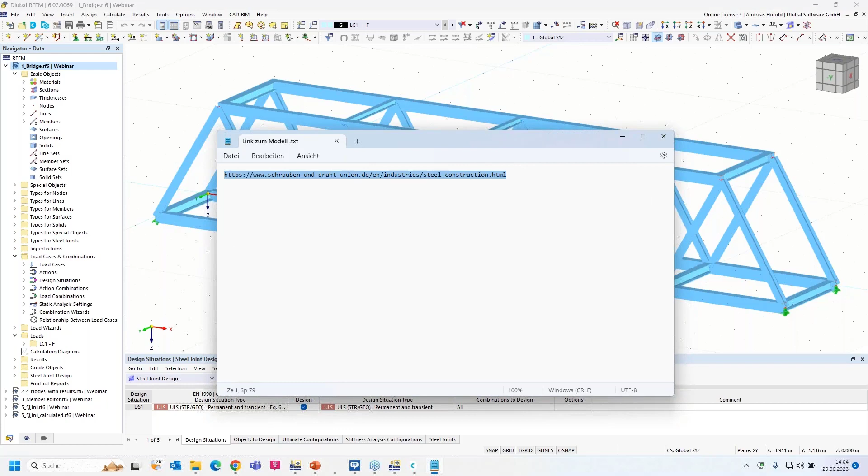Okay, then I turn to RFEM 6. That's a bridge. Maybe at first I show you where I have this. Oh, sorry, I have to open a document. Just a moment. I forgot to open it before the webinar. I will show you an image from the internet where I found the connection. So I have to copy that here and then enter it. Okay.

I found this connection from a steel bridge. And I would like to remodel it, so that you can see the possibilities of our steel joints add-on. You can also design such complex connections. I will enter only a part of this connection, and at the end I will show you the finished model. So let's start. I've already activated the steel joints add-on. Here in the base data, left above, add-ons, and then steel joints. And I had to select the standard, Eurocode 3, also the American standard AISC 360 would be possible.

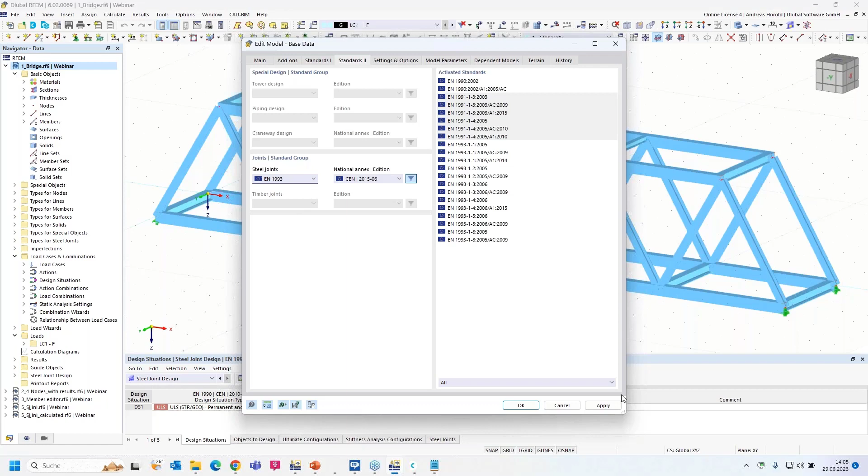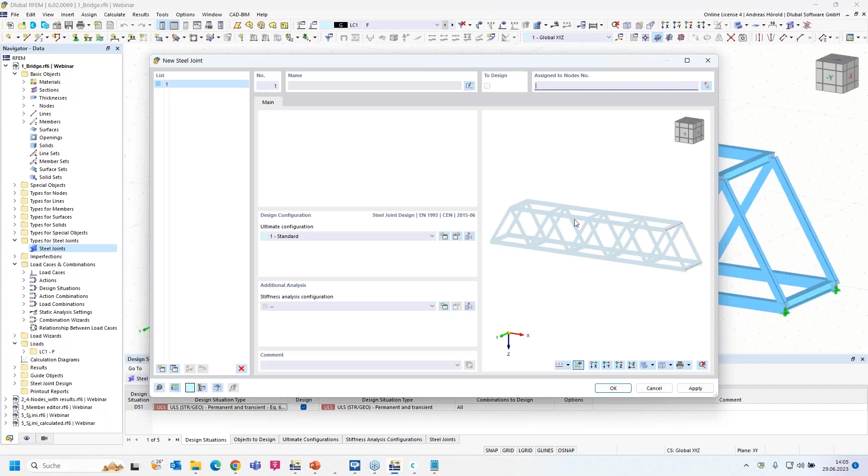Okay, so then types for steel joints in the navigator data, steel joints. With a right click, I can select new steel joint. So in the preview, you can see the whole steel truss bridge. I have to select a node. I select node number 1, the edge. So I'm going to zoom a little bit in. Yeah, I can leave the member names here. If I click on it, you can see it's selected in the preview.

I would like to rename them for a better overview. From member to diagonal, I enter only dia 1, dia 2, then horizontal beam and cross beam. So, okay, then I turn to the next dialog, members. At least one end needs to be supported. I leave that setting. And then the most important dialog, the components.

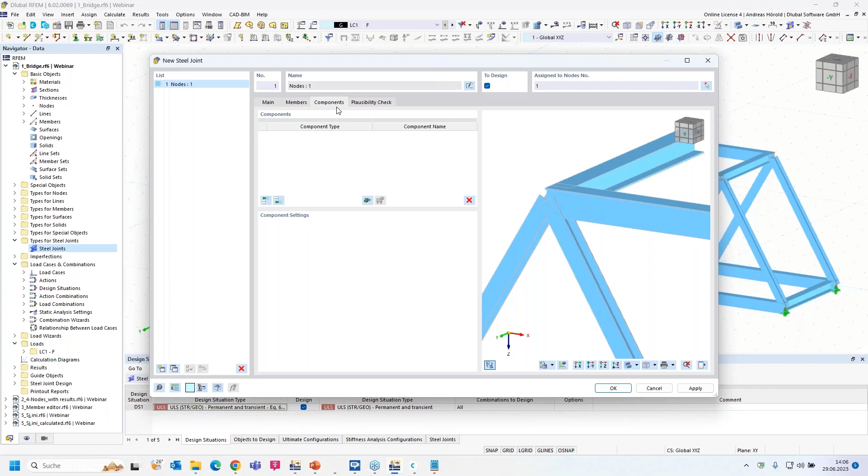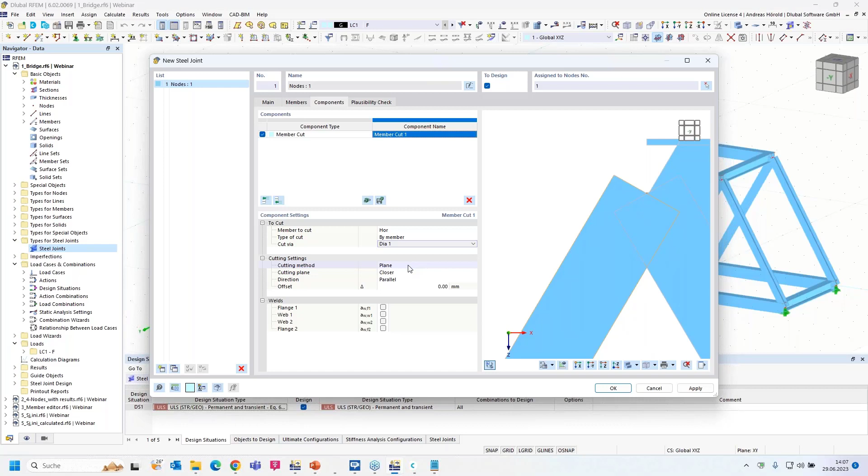So I start with a first cut. I would like to cut the horizontal beam. That's why I insert a component. Then member cut. Which member needs to be cut? The horizontal beam. You can also see that it is selected in the preview window, and cut via diagonal number 1. Sorry, again. Then perpendicular and the closer end, but we need to enter an offset 195.

No, that's not correct. Just a moment. Okay, not the closer, the farther end. And no offset. That was wrong. Sorry. Okay, now you can see the cut. The farther end of the diagonal number 1. So then I insert the next component, also a member cut.

I will need to cut the diagonal number 1 and cut via member. You can also select auxiliary plane or by plate. And this time by member and the horizontal beam. Didn't get it. Okay, horizontal beam. Then perpendicular.

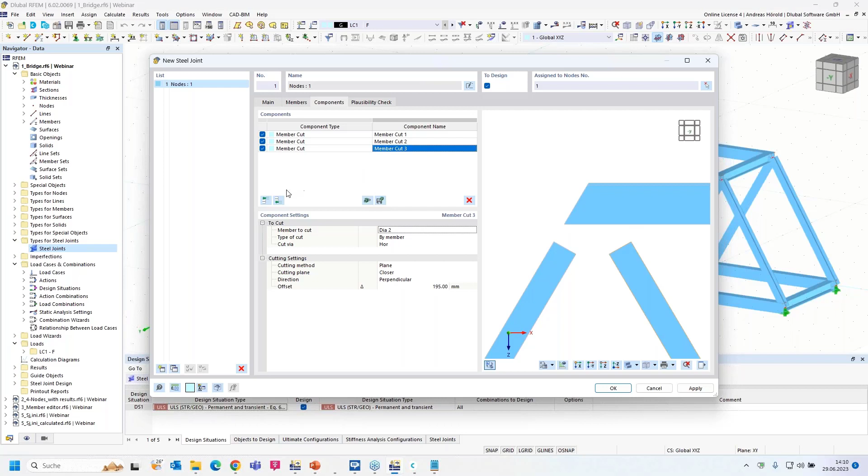And I enter sheet. You can see the different components here. We will use a lot of them today. So that's the plate. Okay. The thickness of the plate should be 17. The width 750.8. And this one 800. Okay. Then the origin should be the member plate.

I have to enter the material. Sorry. So then the values are correct. So, and then member plate, and the horizontal beam and web 2. Okay, I can show you where it is now. So you can see it. And if I enter here the half of the plate and the half of the web, minus 40.5, it will be moved on the outside. So, and I have to enter a value here. Okay, this position is correct.

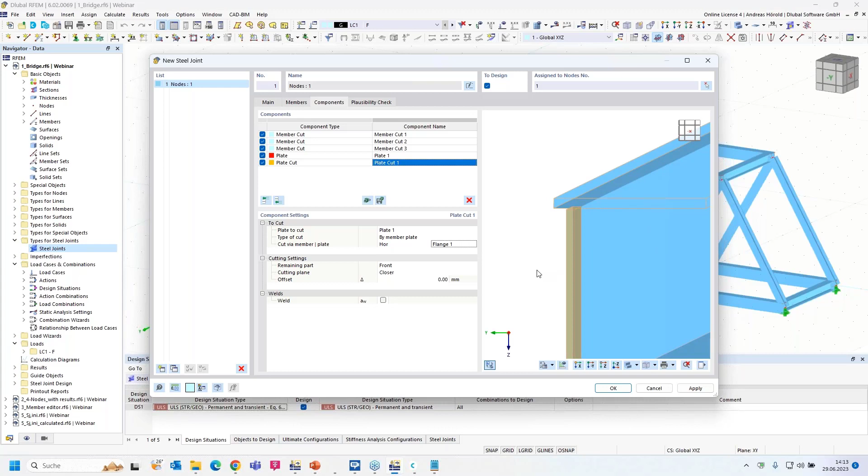So then we add a new component, the plate cut. Okay, plate 1 by member plate, the horizontal beam, and the flange 1. Okay, that's quite okay. And I would like to enter a weld. Not a double fillet weld, but a fillet weld on the rear side. Yeah, this one wouldn't be possible. Okay, and I enter another value here for the weld, 8 millimeters.

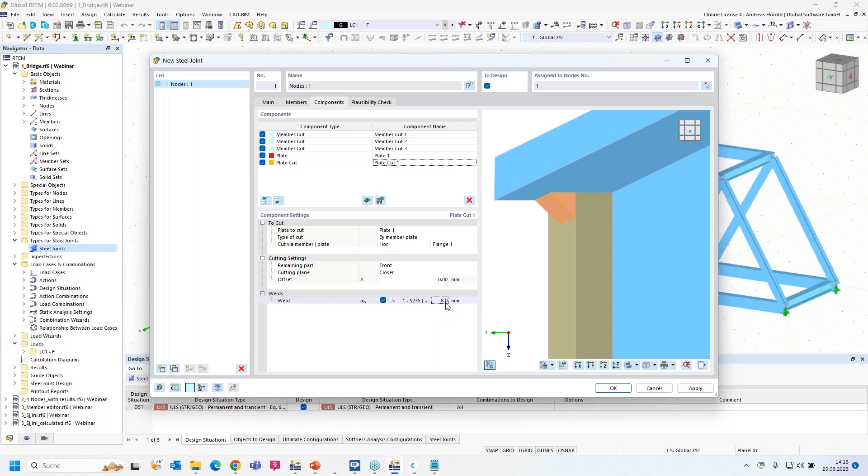Okay, then the next plate cut. Diagonal number 1 and the web. Okay, but the rear and, yeah, the closer end, but an offset of minus 125. Okay, yeah, that looks already quite good.

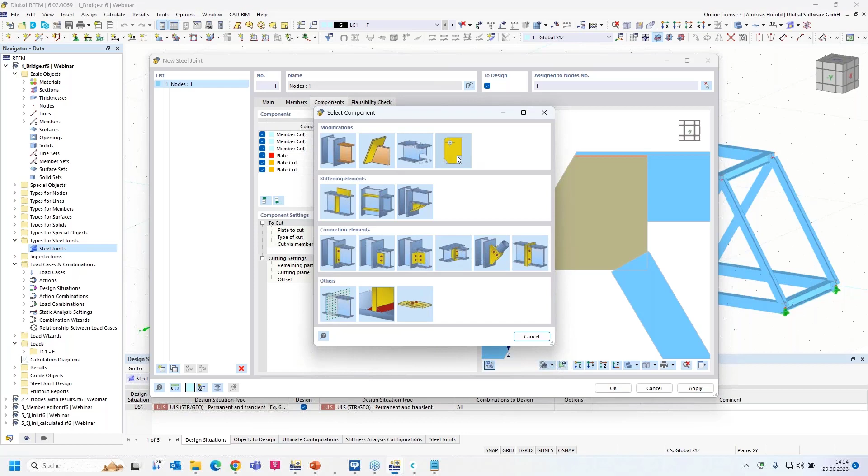So, and now we turn to the plate editor. I enter a new component, the plate editor. Plate number 1. And what is new is the opening, and we will use the opening. You can enter circles, rectangles, polygons, hexagons, these 4 possibilities. And I use the hexagon. You are quite flexible because you can enter the values here. It can create any hexagon.

So 300.11, 150, 260, 400 as offset or as center point. Okay, and with this plate editor, you can enter such things. You can also enter a rounding here as you want. So then another plate editor, I have to cut these triangular parts of the plate. So then the next plate editor.

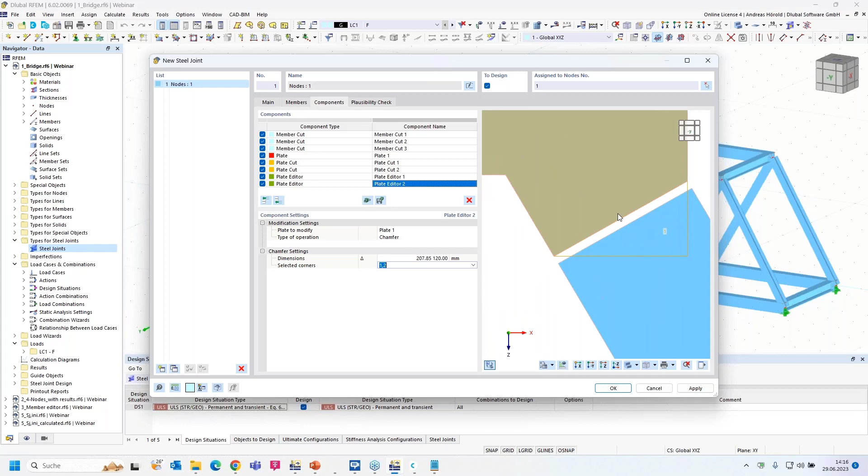So then plate 1, chamfer, 207.85, 120. Okay. And then I don't want to cut all corners, only 1 and 2. Okay. So, and that looks quite good now. The next step would be to enter our welds here, and then a lot of copy and paste.

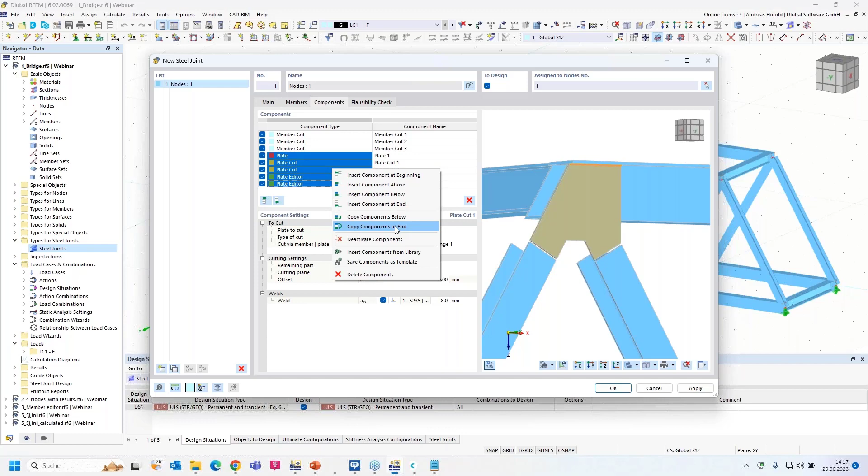I can show you how to, for example, copy and paste this plate here. I would select the last 5 lines, or what is necessary for the plate, and then copy components at the end. And I only have to modify the plate 2. I show you this view. So, and I only have to enter 14.5 and the other web, horizontal beam and web 1. And now the position is correct.

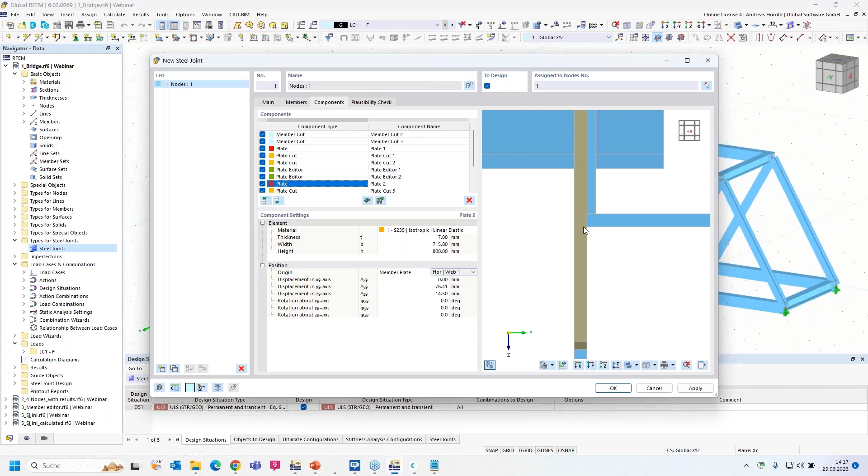Then it would be necessary to create other plates and fasteners and so on, but that would take too long. I switch to the finished model. Just a moment. That's the finished model of the steel truss bridge, with the 4 edge connections here, also of the cross beam. You can see the fasteners and so on.

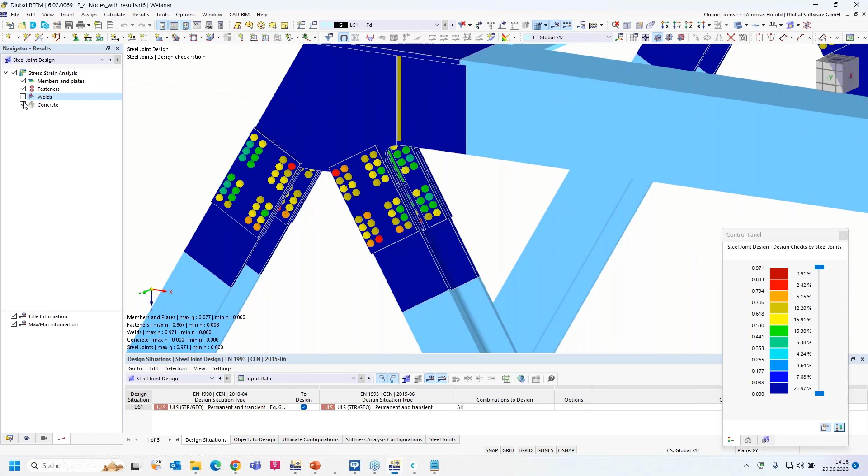And if you want to see the results, you can check it here in the navigator results. You can see the single components, for example only the fasteners, and the design ratios. In the table below, you can see the different design check ratios. Maybe I'll check also the welds and so on.

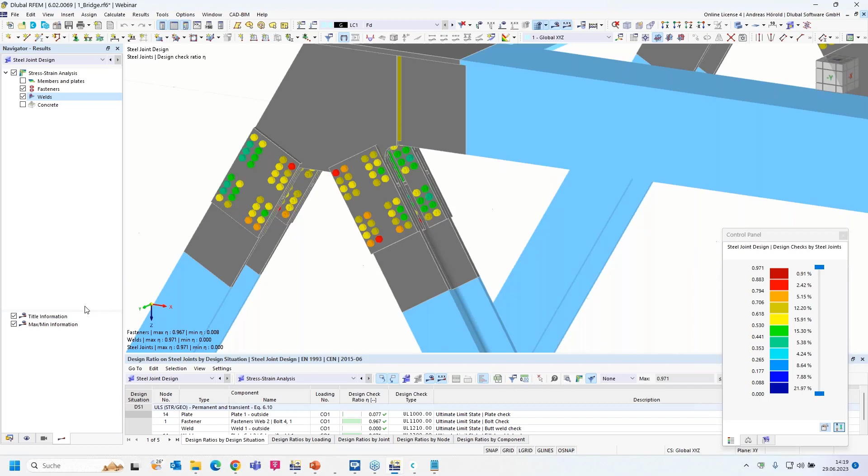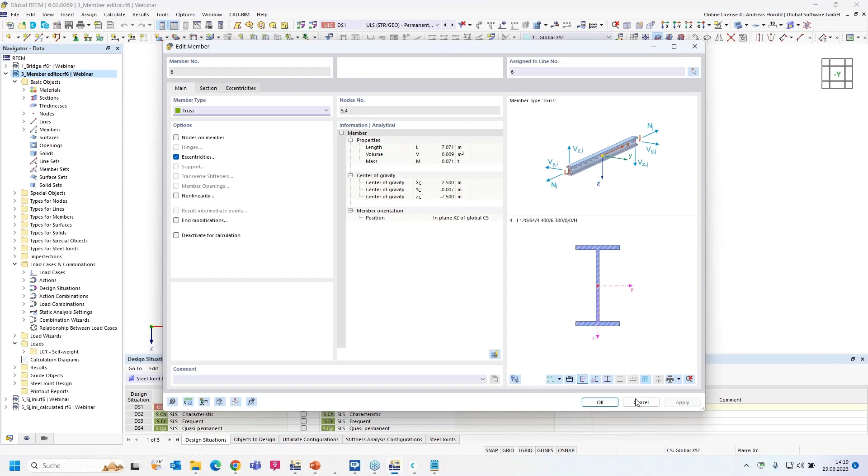I close the model and turn to the next model. So that's a multi-story frame with different diagonals. This diagonal is an I section, this is the same I section, and this is a rectangular hollow section. That possibly makes no sense in practical use, but I would like to show you 3 different connections for diagonals, the first one and the second one with the member editor.

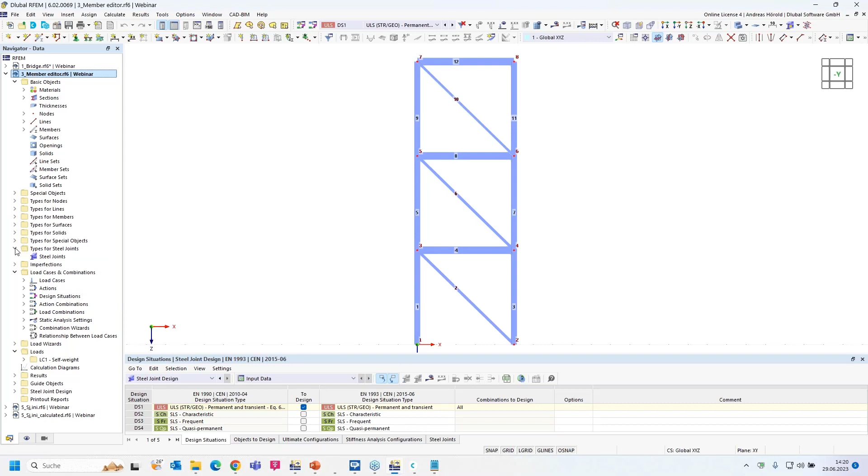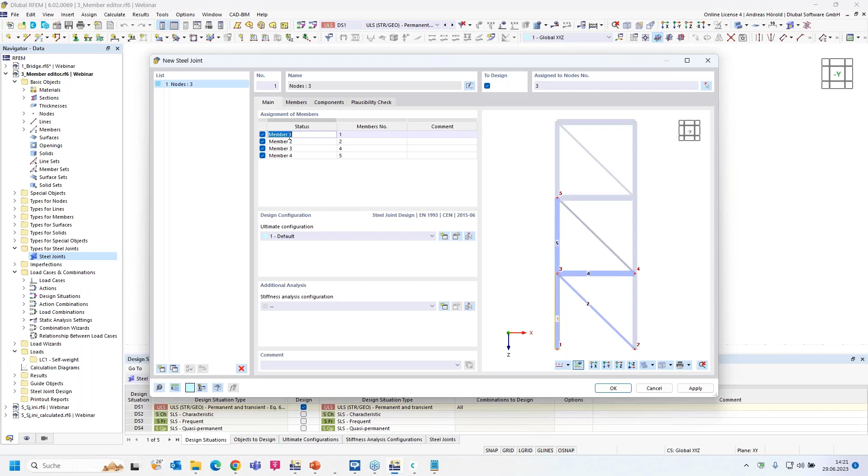So I start with that point here, steel joints, right click, new steel joint. I select the node. Okay. And I will rename the single members as well. Another possibility is you can change the order of the members if you want. Maybe I can show you how to do that. That's the column, and the next, in my eyes, should be the horizontal beam. Horizontal beam, okay. So this one should be the diagonal.

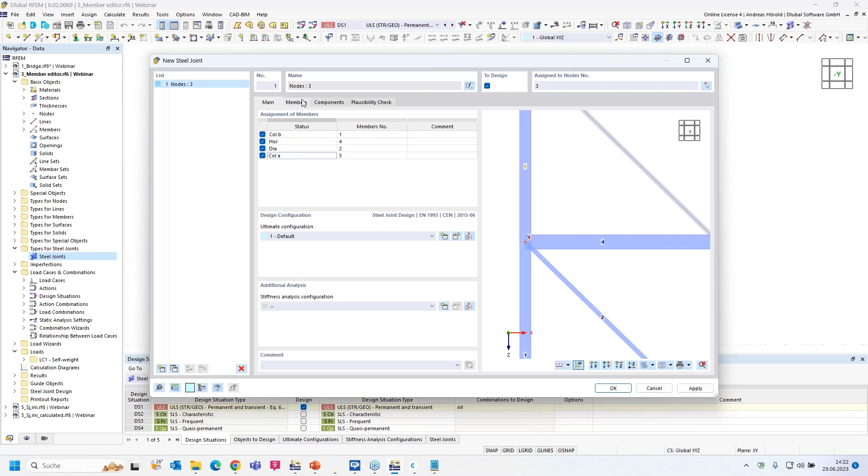And the last one, the upper column. Okay, that's a possibility. I will rename one. So that's the column below. This is the horizontal beam, diagonal, then the column above. So then we turn to the members, at least one should be supported.

And I also have to select continuous, so that we can connect the horizontal beam to the continuous column. It didn't get it, just a moment. Okay, now it's correct. So then components. I start with an end plate. I enter this component, end plate,

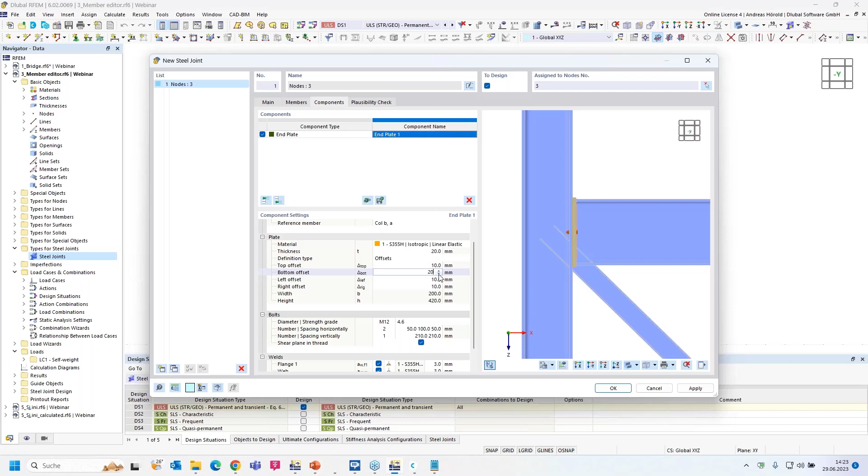the horizontal beam. So I zoom a little bit in. And the reference member should be the continuous column. So the same material as for the members. The thickness should be 20, then 200. So, and then I can show you the left and right offset, 5 millimeters and 5 millimeters. Okay.

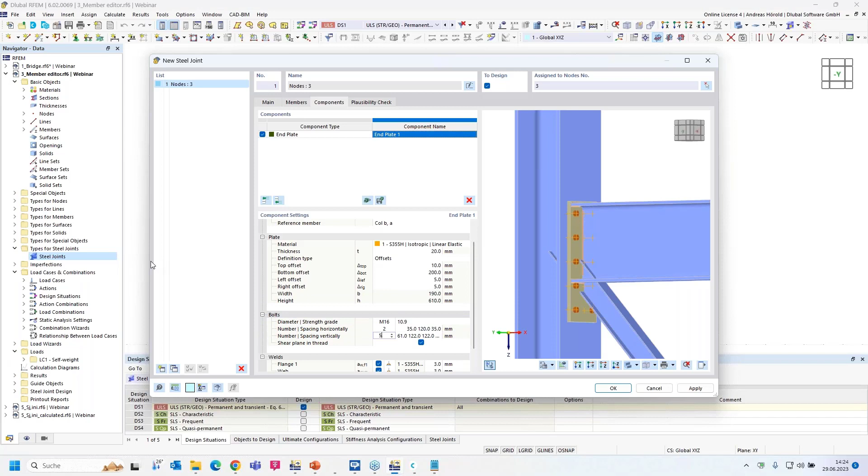So then the bolts, the diameter should be 16 and the strength grade 10.9. So I only have to enter the vertical spacings, and we got 5 vertical spacings. I can also increase the window so that we can see all values here.

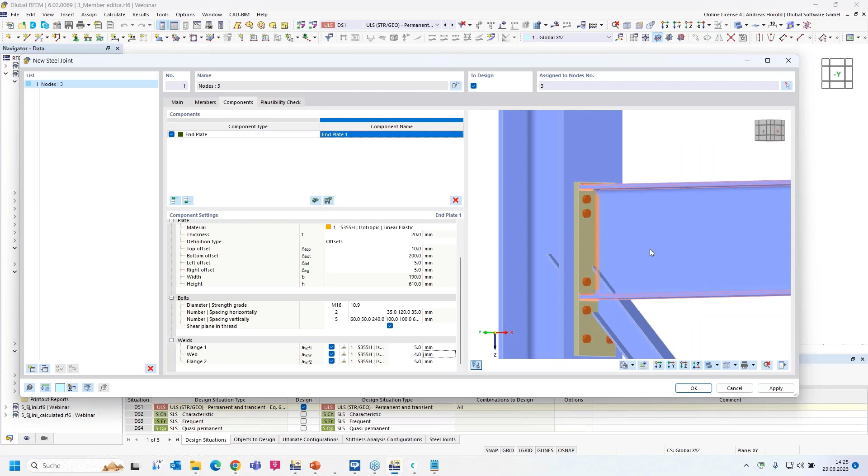So, okay, and 60, 50, 240, space 100, 100. Okay, so that should be all for the bolts. And I only need to define the different welds. 5 for the flanges and 4 for the web. So, okay, that's all for the end plate.

And now I enter a haunch here. Maybe I show you this view. Next component, haunch. So where should the haunch be placed? On the horizontal beam. And the web is okay. Plate. So, and then end plate 1, plate 1. That's okay. So material, the same as for the members.

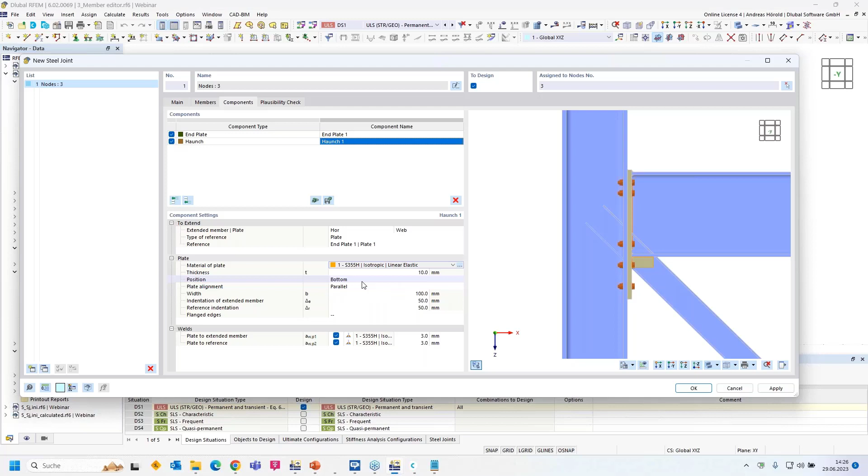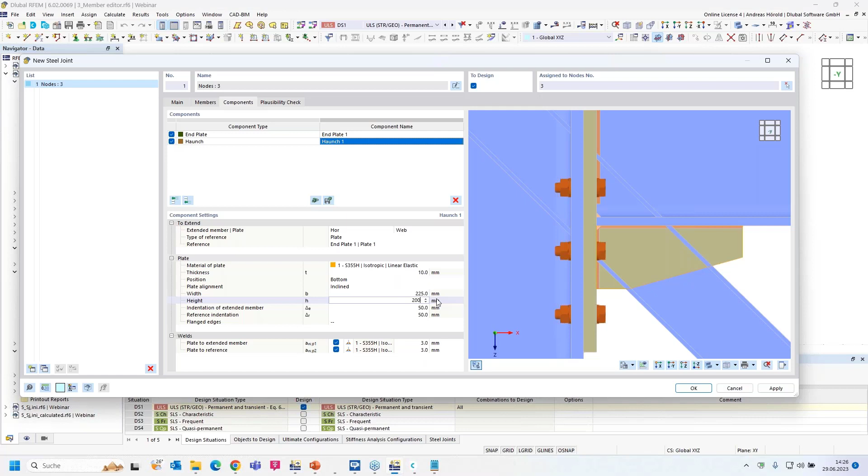Then at the bottom, okay, but not parallel, but inclined. So then the different values, 225, 200, 100, 125. That looks quite good. We only have to define the welds, 4 millimeters. Okay.

So, and now we need to cut the diagonal. Yeah. Diagonal is too long. You can see that in the preview. So that's why we enter the next component at the end, a member cut. So as I already mentioned, the diagonal by member column, then plane is okay, closer end, but not parallel, perpendicular. So with an offset of 100 millimeters. Okay, that looks already quite good.

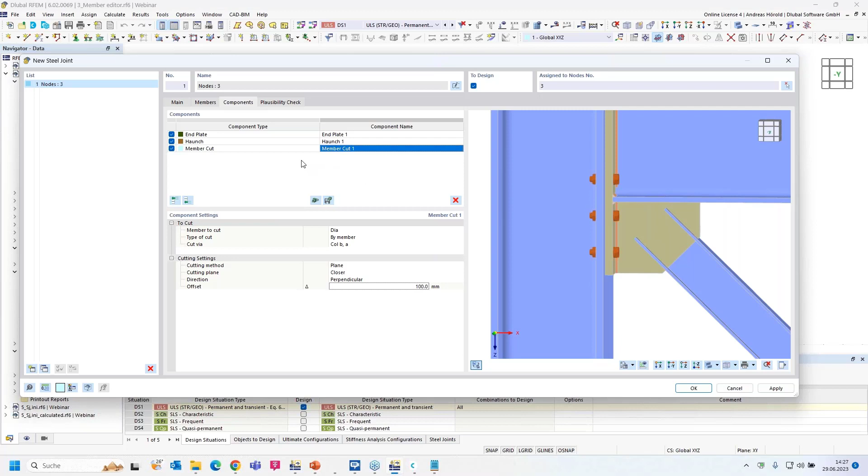So the next step is the member editor. That's quite a new component. So I add it at the end. Member editor. So then member plate is okay. Diagonal flange 1. So, and with an end offset. And the offset should be 130. Now you can see in the preview window what we did, we cut that flange. So that was the upper flange, and now we would like to cut the lower flange.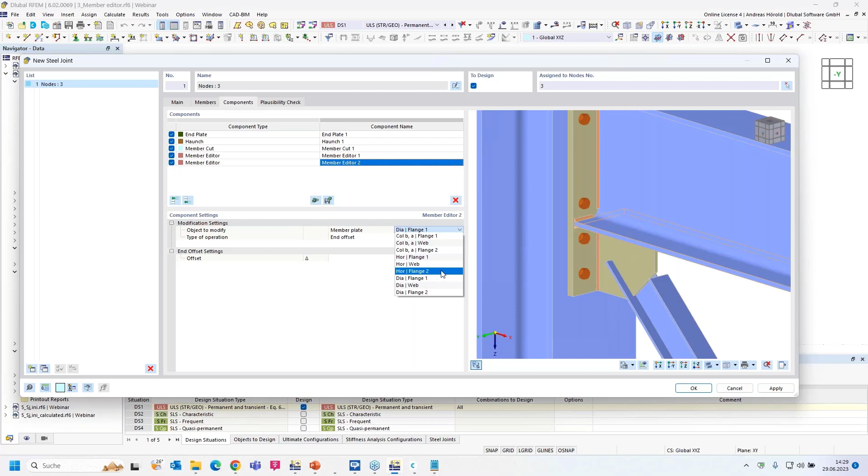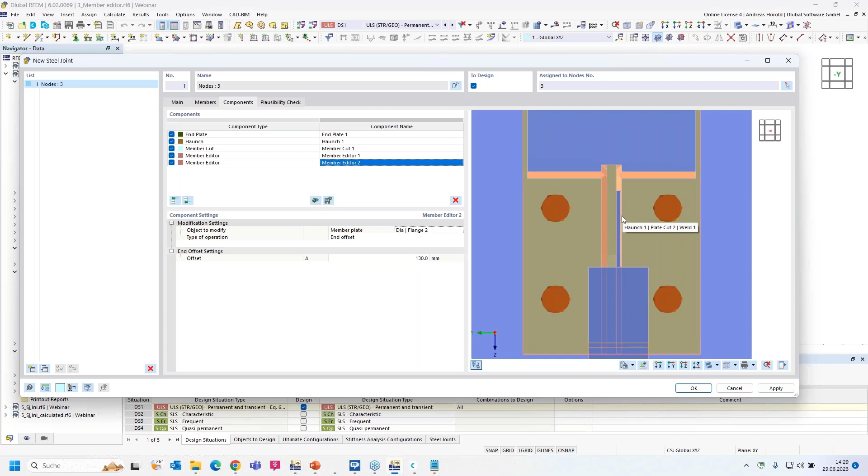That's why I copy that component, copy components at the end. So, and for flange 2, diagonal flange 2. Yeah, that's all. So now you can see that the web is not exactly in the axis of the haunch. That's why I defined a small eccentricity in the global frame model, so that the connection will be fine. Just for your information. Okay.

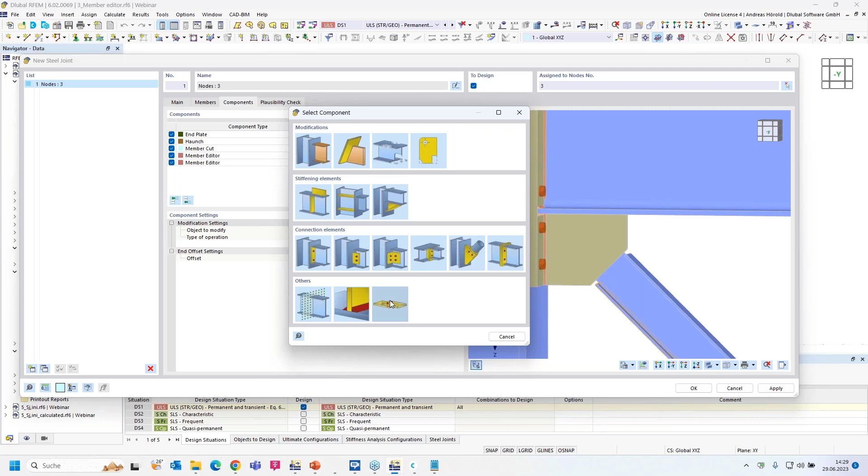Yeah, last but not least, we have to enter the fasteners at the end. I will enter a component, the fasteners, the last component in this dialog. So then component plate of the haunch, and then member plate, and diagonal and the web. So those components should be connected with the fasteners. Then the position diagonal web.

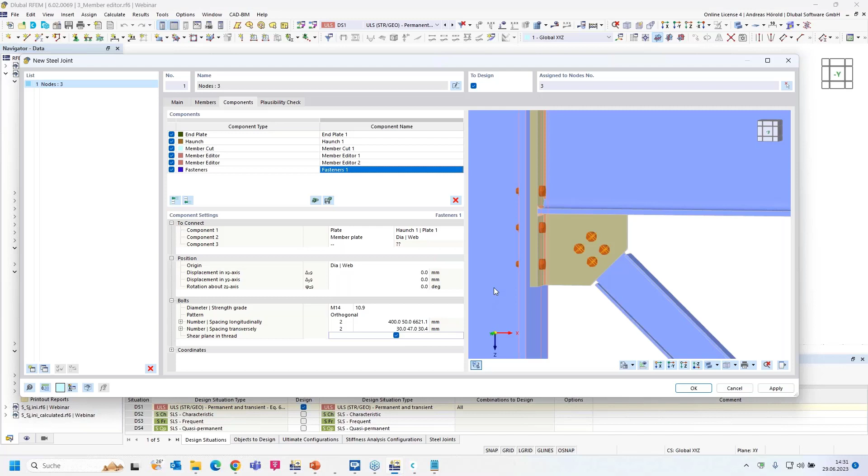The diameter should be M14 and the strength grade 10.9. I have to enter the spacings here. Okay. Also, there should be 2 fasteners, then 30. Okay. Yeah, that's all. You can cut such member flanges, for example, with the member editor.

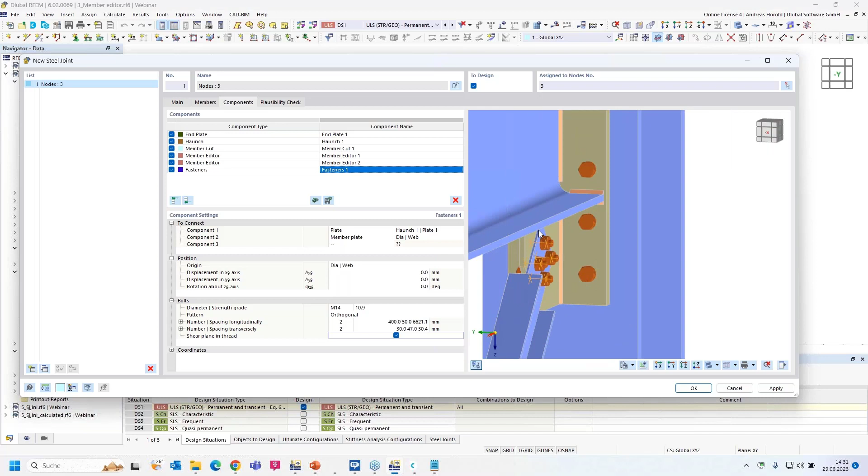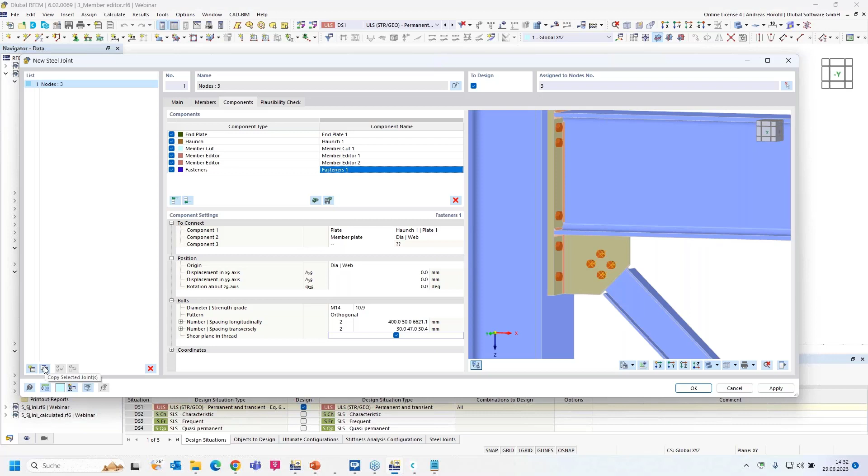In the next connection, I would like not to cut this part of the flange. I think it's not necessary, and it's better for the flow of the forces. That's why I copied that connection, or that steel joint, with that button at the bottom left. Copy selected joints. So, and I select node number 5, and I delete node number 3. So all was copied, but I need to modify the member editors.

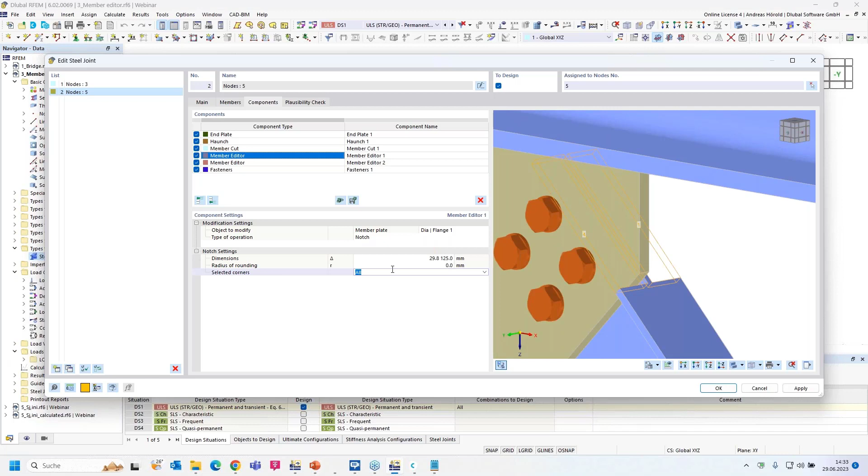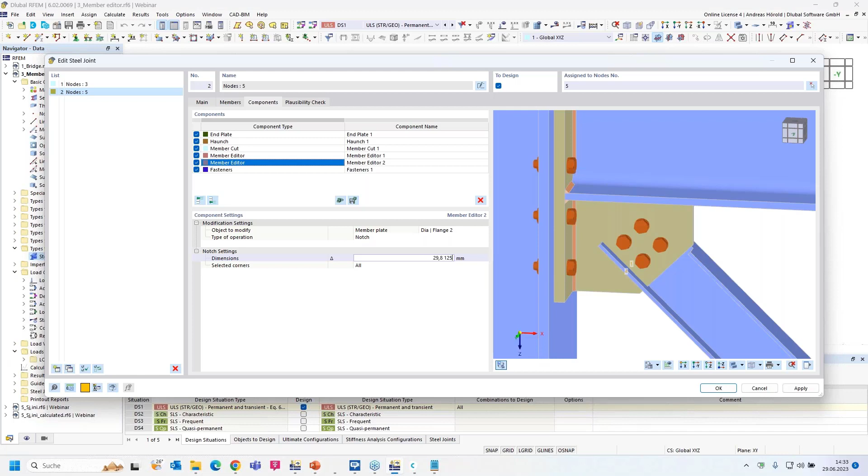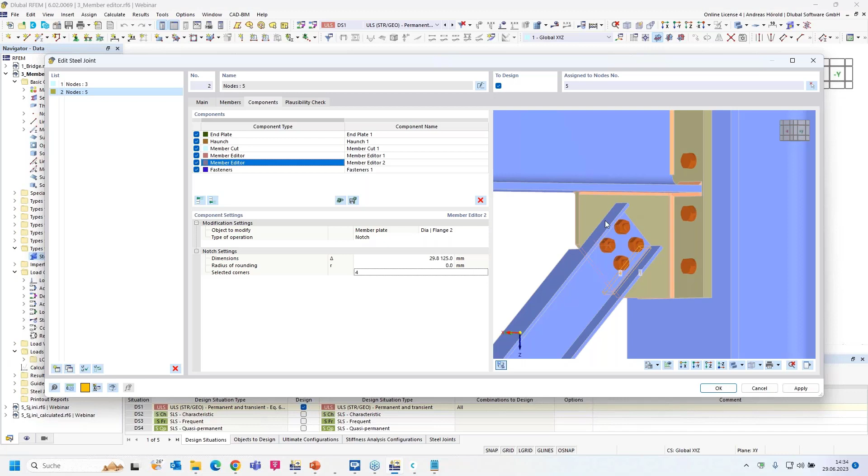The same for the other member editor. Notch. And the same distances here. So, and also only part 4. So you can see, almost the same steel joint, but with this part of the flange. You can see how flexible you are with the Steel Joints add-on.

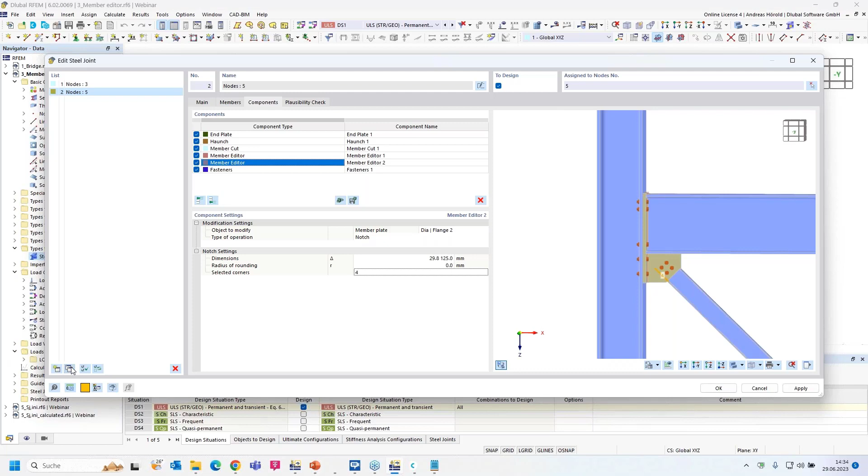So then another example with the rectangular hollow section. I copy the connection again. Select this node. Okay, and delete node number 5. So then the components. Now we have to modify something. We can use the end plate, the haunch, the member cut, but we delete these lines.

Okay. And I have to modify at first the member cut. So I have to enlarge the column, 240. The diagonal, sorry. That's okay.

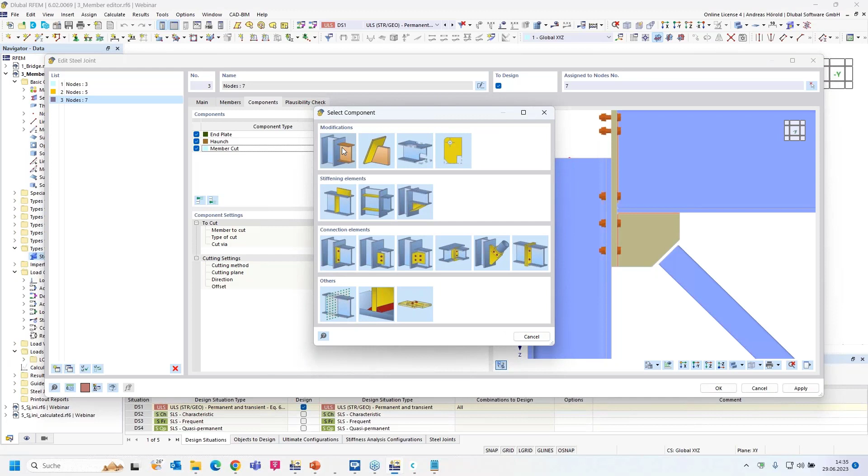Just a moment. So then I have to enter another member cut to enlarge the column here. So member cut column by member by horizontal beam, plane the farther end, and with an offset -50. So that looks quite good.

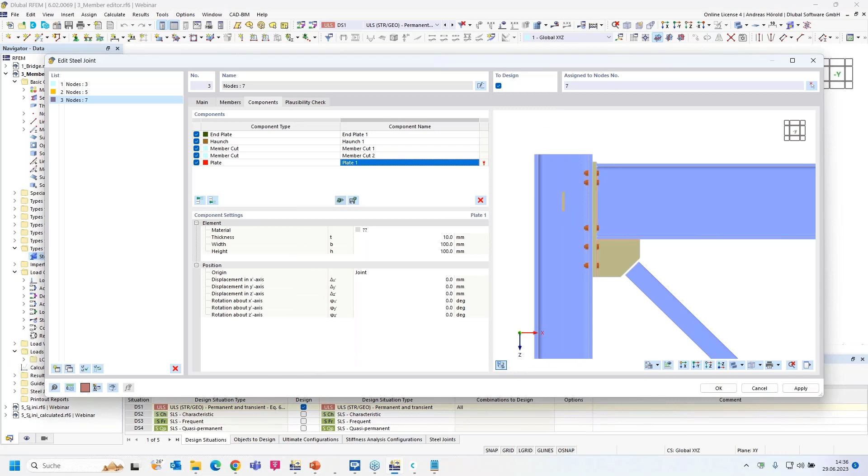Okay, then the next component, plate. This component, plate. This should be the plate in the rectangular hollow section. There will be a weld and a member cut, and we connect this with fasteners or with bolts. So then material, same material, thickness 5, and width and height.

Then plate. Which plate? The haunch. I didn't get it. Okay. So, we have to enter the dimensions or the displacement. 63, 45, 7.5, and we have to rotate it 45 degrees. So, yeah, that's quite okay.

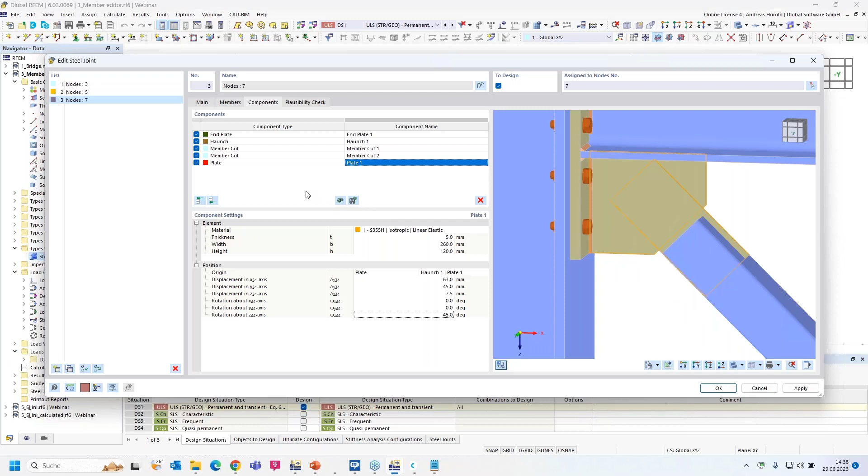So, and now we have to cut out this part here, where the plate is. So that's why I enter a member cut. Diagonal by plate. And plate 1. So then by surface, that's quite good. And we have to enter the welds for the flanges.

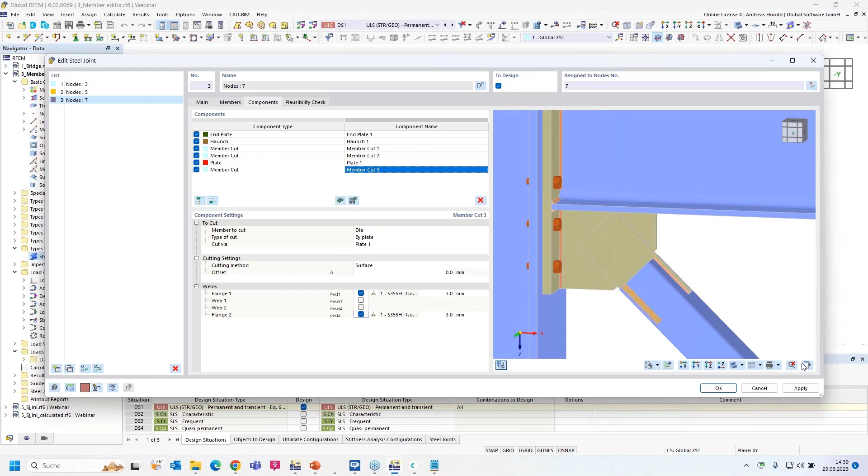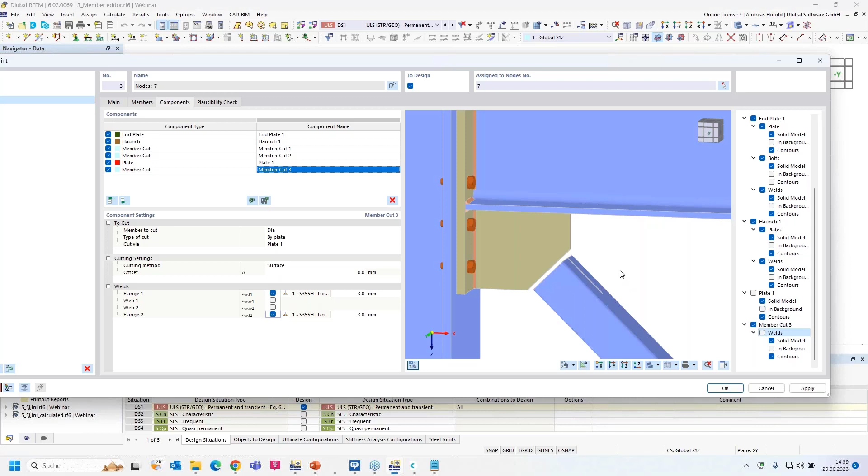So maybe I show you the result. Right at the bottom, you can click on that button. I have to move it a little bit, and you can select and deselect the different components. And if I deselect, for example, the plate, and from the member cut, the welds, now you can see that cut here. That was the member cut.

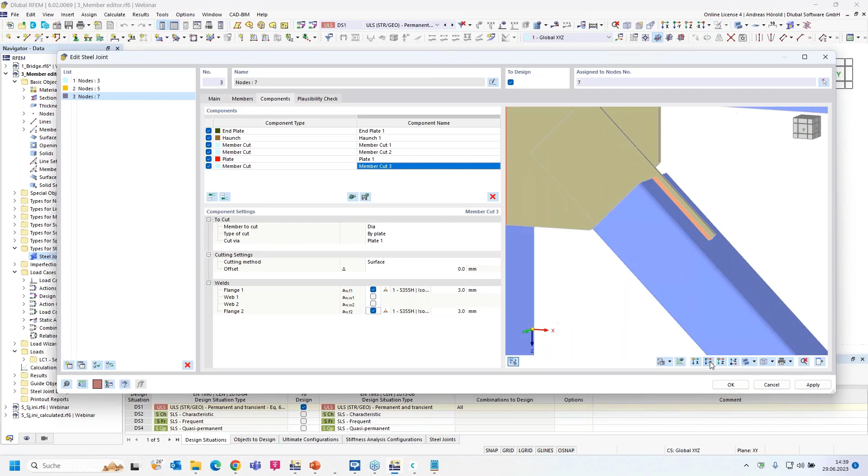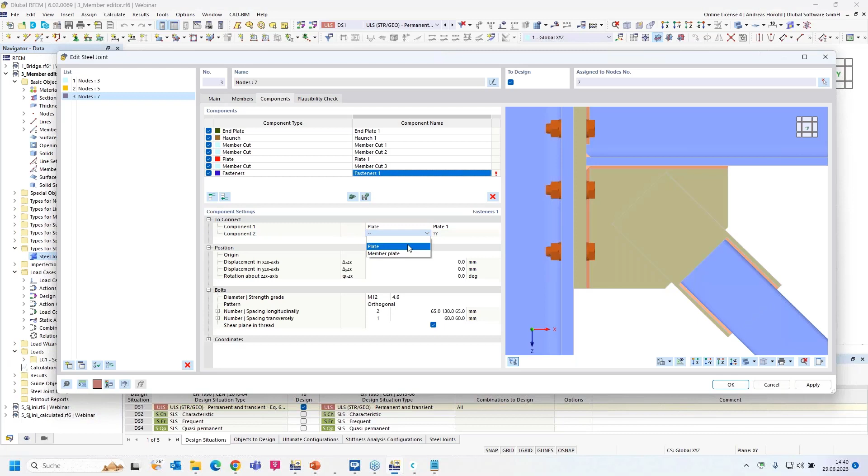So I select all again, close this area of the single components. So, and we have to enter the fasteners. So at the end, I add the fasteners. Which components should be connected? The plate, plate 1, and the haunch. So, okay.

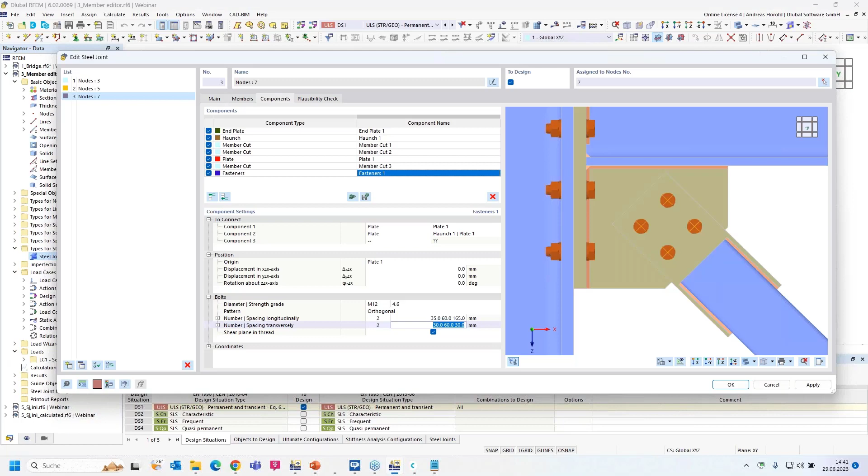And we only need to define M12 4.6, that is okay this time. Then we need to enter the spacings, 35, 60, and yeah, that's quite okay. Now you can see the connection is finished. You can see with these examples, you can connect different cross sections as diagonals. You have got all possibilities. Only some examples.

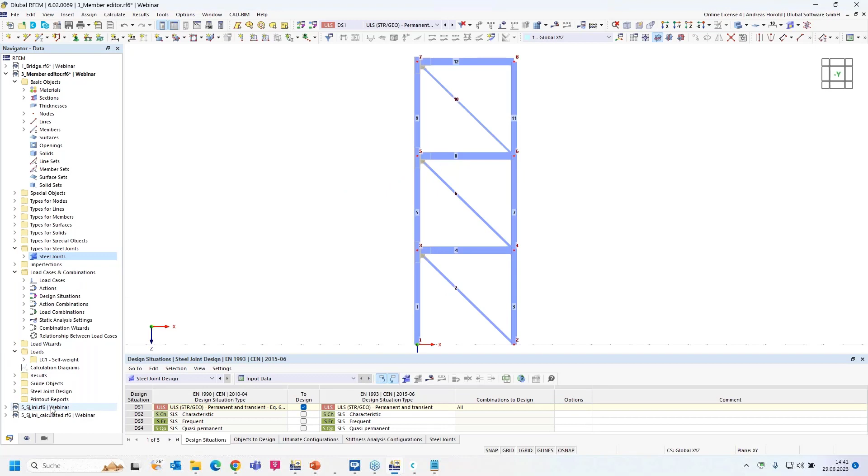I turn to the last part of the webinar today, the initial stiffness, a quite new feature. I open another model, a simple steel frame. And I would like to show that on that example with a rigid connection here at the end. And I enter a DSTV, a standardized connection where you can see the initial stiffness.

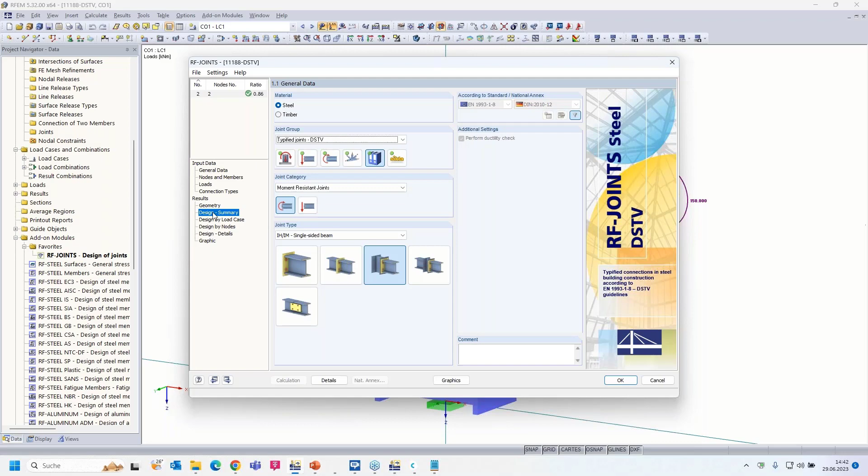I show you that in RFEM5 we had the RF-JOINTS add-on. That's a DSTV connection. I can show you the general data, typified joints according to DSTV. And I designed it, and you can see the initial stiffness from the guide, 33.6. And we remodel this connection in RFEM6 and compare the initial stiffness of the DSTV guide and from the Steel Joints add-on.

So I turn back to RFEM6. I create a new steel joint. I can select the two nodes. Okay, so I rename them again, the column and horizontal beam. And that is a new component here, the additional analysis, a new feature in the Steel Joints add-on. I've already renamed it. You can go to the dialog. That's the new feature, initial stiffness.

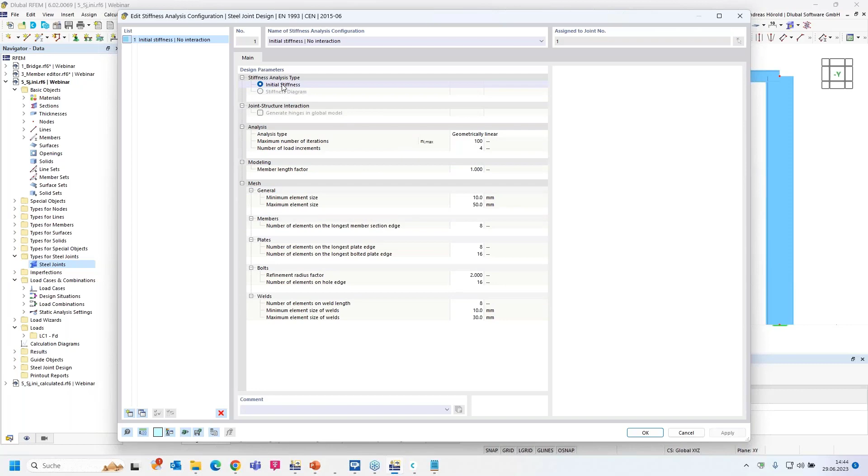And the stiffness diagram and the possibility to generate hinges in the global model are already there in gray; those are features that we will implement in the future. Okay, so we would like to calculate the initial stiffness of a certain connection. So members, next dialog, at least one member end should be supported. So, and where is the stiffness analysis?

And if you want to analyze the stiffness of the connection, you can select here normal forces, the moment, My and Mz. To compare it with the DSTV guide, I select only My. But you can also select all. So that's all for this dialog.

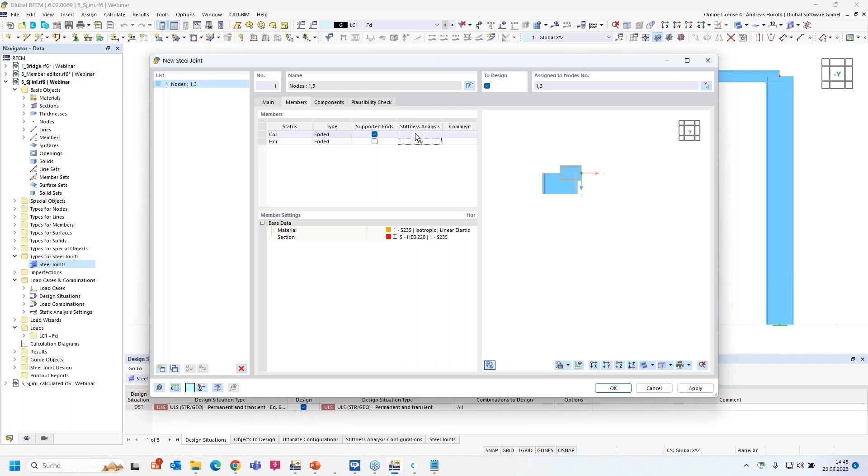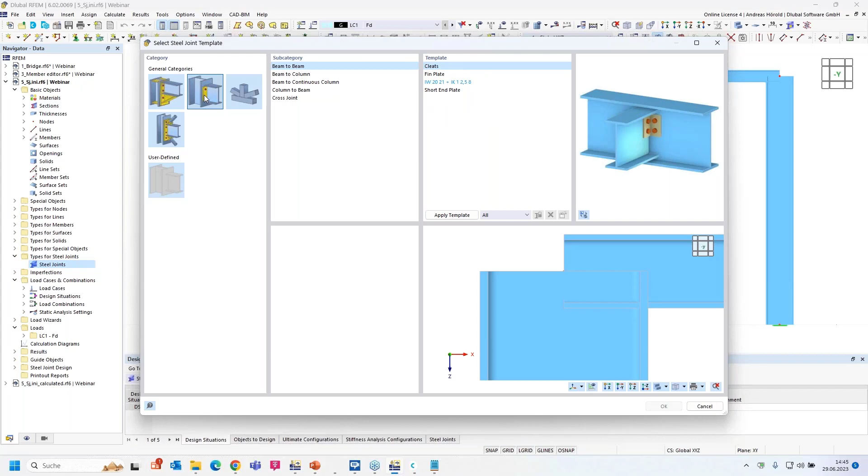I enter the components. And this time I go to the components library, a quite large library with predefined connections. Here the main category is rigid, then pinned, the truss connections, bracings, and we would like to use the rigid connection: beam to column and the end plate column stiffness.

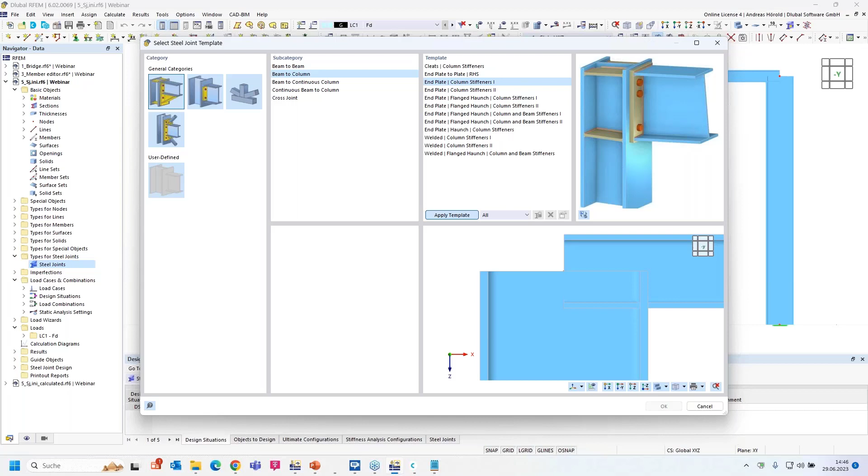Then if I select apply template, the single components of this connection are loaded in our Steel Joints add-on, and then you can see in the preview that the connection looks quite good. We confirm it with OK. And we have to enter or modify the connection according to DSTV.

First, I modify the member cut. I enlarge or increase the length of the column. I can see that in the preview. We will have bolts also over the flange. That's why I have to increase the height of the column. So then I have to modify the end plate.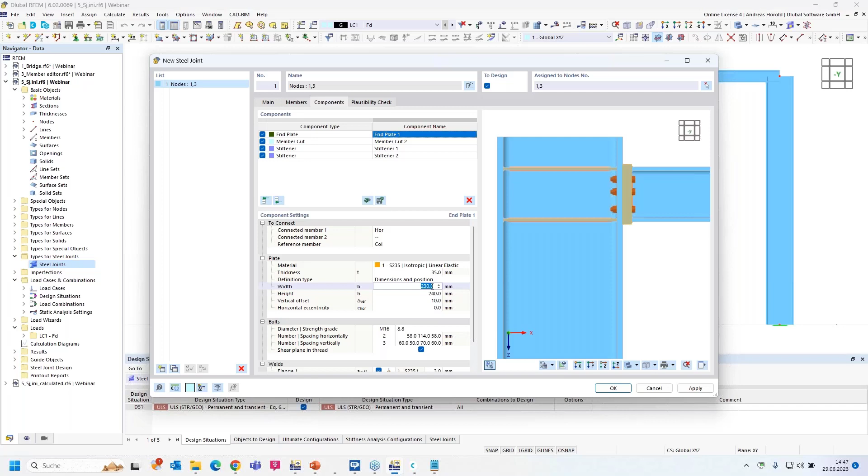The thickness should be 35. Then I use this time the dimensions and positions to enter the values from the DSTV guide. 340, 105. Okay. So the diameter should be M24 and the strength grade 10.9. So then the different values from the DSTV guide.

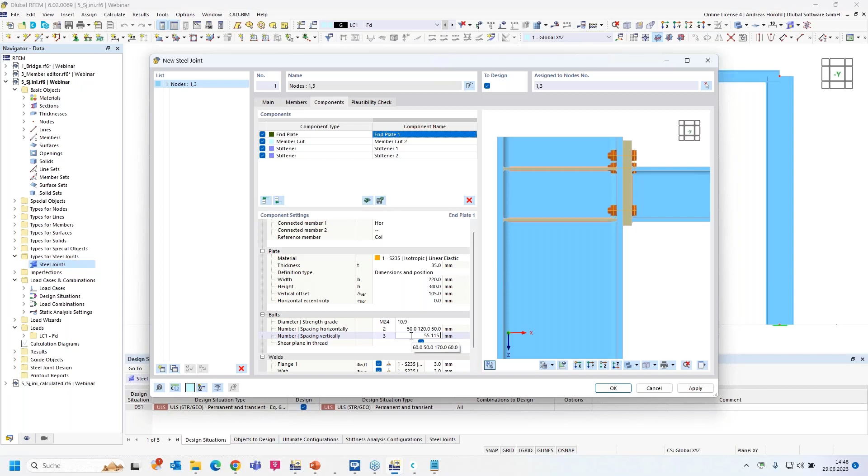(55), 115, space 90. And the last dimension is calculated automatically. So that's quite all. Now the welds. But before I enter that, I have to uncheck that the shear plane is in thread, because according to the DSTV standard, in the DSTV guide, the shear plane is in the shaft. That's why I uncheck this.

And now I enter the welds of the flange, 8, 5, and then this flange, 8. Okay. That's quite all for the plate. So stiffener, we have got 2 stiffeners. I delete the second stiffener.

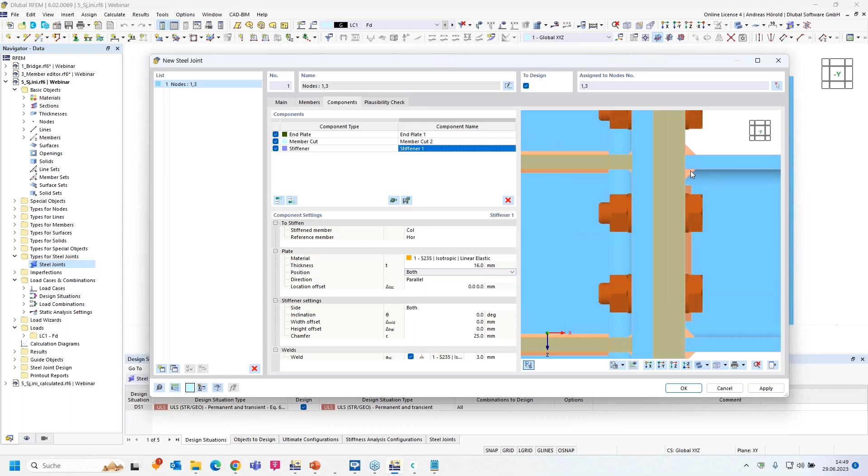So modify stiffener 1. At first, I select side, the position, both. And now I can only do one entry. 16 millimeters. According to the DSTV guide, the thickness of the stiffener should be minimum the thickness of the flange of the horizontal beam. Okay, that's all. I only have to define another weld, 6 millimeters. Okay.

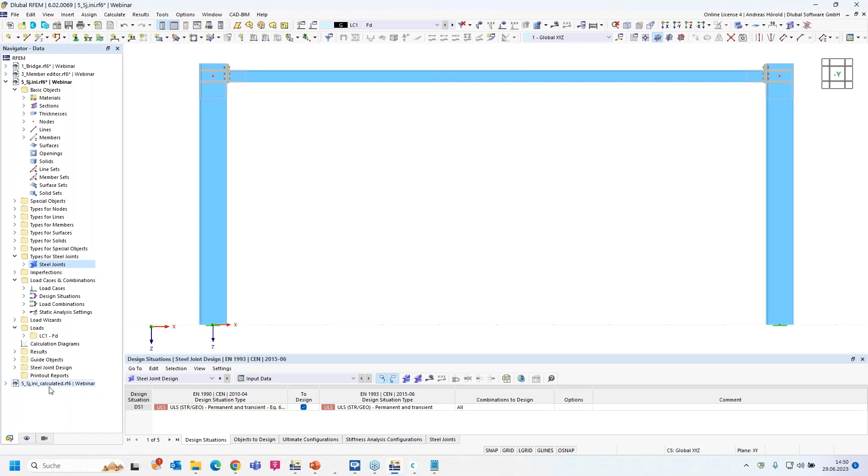And with this button, you start the analysis of the stiffness. It would take half a minute. I skip, or I turn to an already calculated model, and you can see the results of the stiffness analysis. And there's the value for Sj,ini: 33.2. Let's compare that again with RFEM 5,

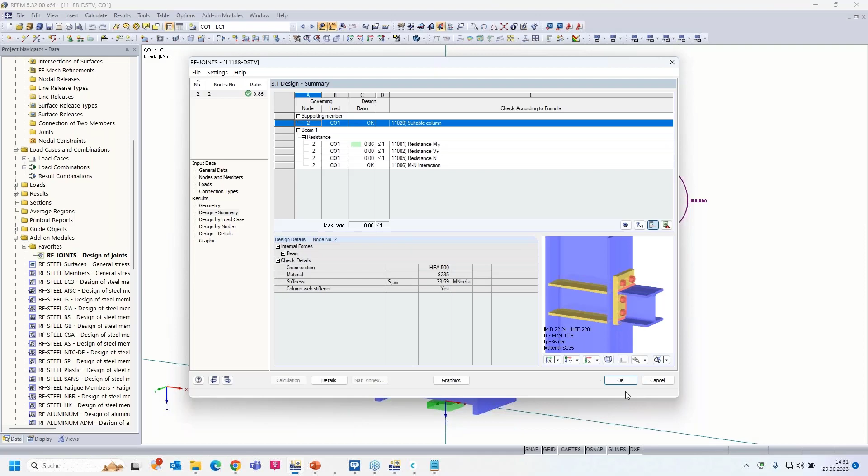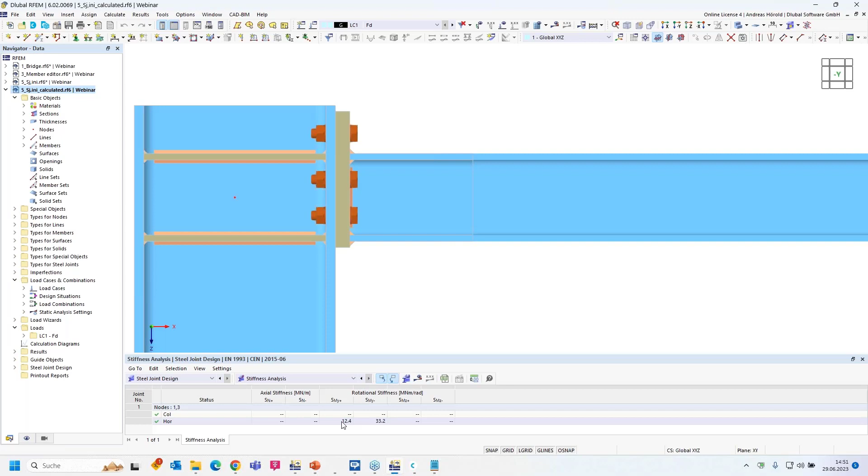33.6. Nearly the same value, but the advantage of the steel joints add-on is you also get the rotational stiffness for M+. When you have got a positive moment, there is of course another initial stiffness. And you can also get the results for the stiffness of normal force and so on.

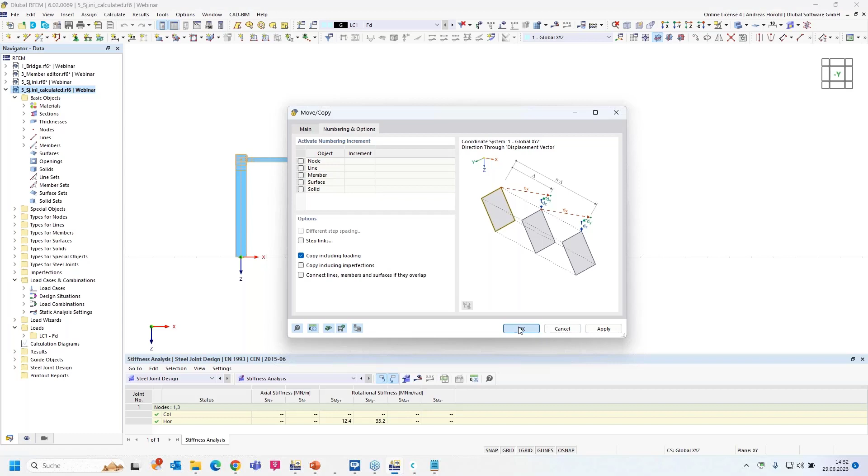Okay, to consider the initial stiffness in the main model, I copy that frame to show you the difference. So right above, move copy, I create a copy, 15 meters in X direction, and also copy including loading, so that we get the same results. Let's check. Okay.

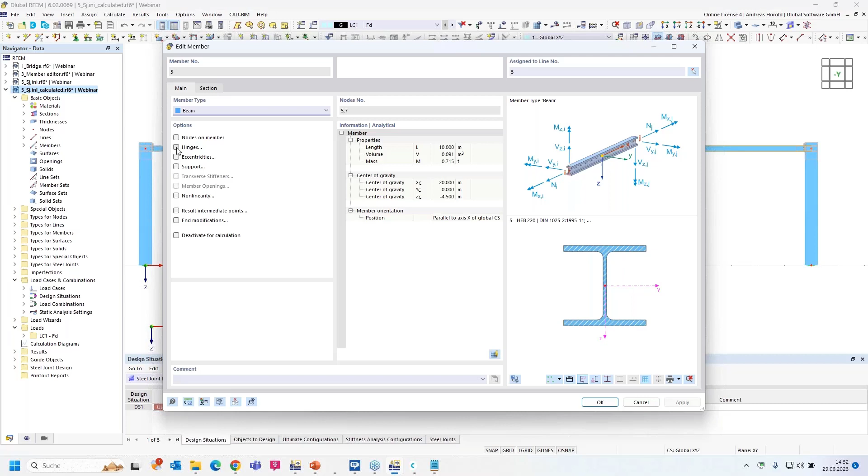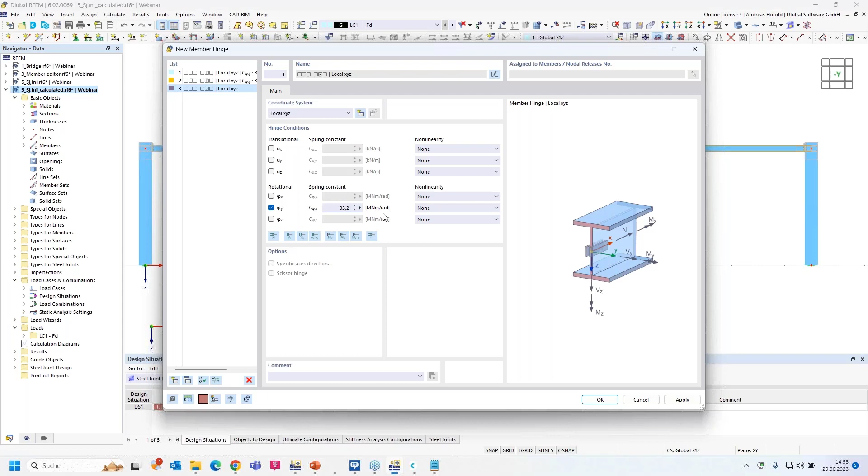And now I double click on the horizontal beam. I select hinges, and I define the hinges. Around the y-axis, you can see that in the preview, and I enter the rotational stiffness in meganewton meter per rad. The default setting is kilonewton meter per rad, and I changed it previously so that I can compare the entries better with the DSTV guide.